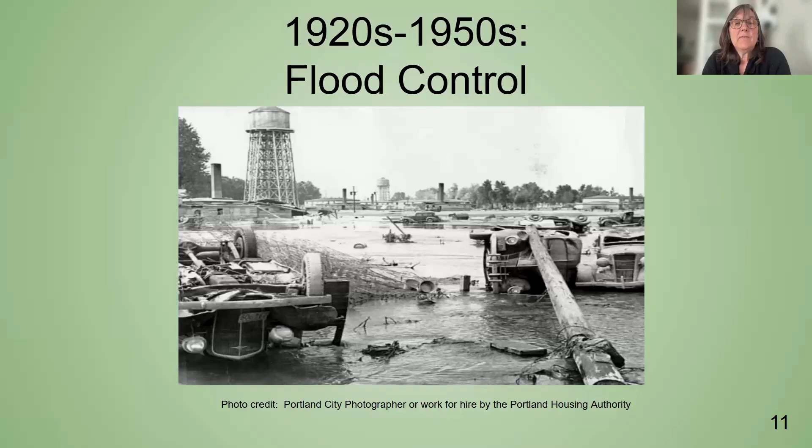Coming out of World War II, an iron triangle had emerged, comprised of elected officials, federal agencies like the Army Corps and the Bureau of Reclamation, and interest groups like local and regional boosters, that virtually ensured dams would continue to be proposed, permitted, and built.

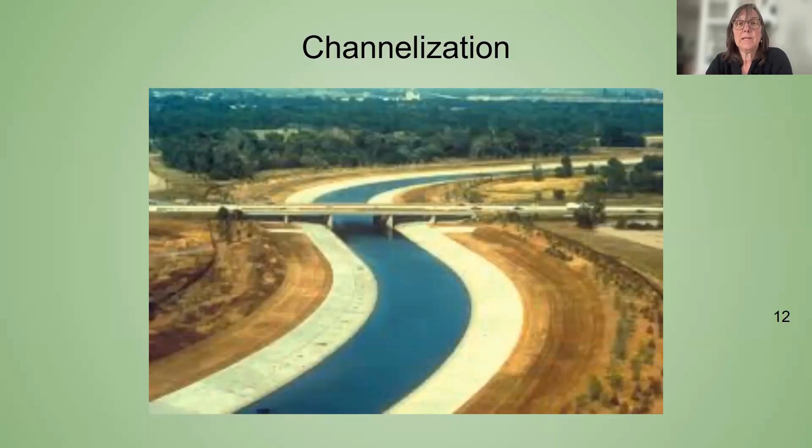These examples have mostly focused on dams, but many other threats to rivers developed, including but not limited to channelization, dredging and filling, shoreline development, upland development that decreases recharge and increases runoff and flooding, and riverine habitat loss.

Water pollution became a top environmental concern for the American public and elected officials. The 1960s and 70s was a time of public outrage over the impacts of industrialization on quality of life, coupled with new environmental consciousness in the U.S. Congress. During this period, a number of new laws geared to protect natural areas and the environment were passed that would have a direct effect on wild and scenic rivers, including but not limited to the Clean Water Act, which first became law in 1972.

This is a photo of the Central Arizona Project, a diversion canal that carries water more than 300 miles from the Colorado River to central and southern Arizona. It supplies water to Phoenix and Tucson, as well as smaller communities and irrigation, and provides flood control, outdoor recreation, and wildlife conservation.

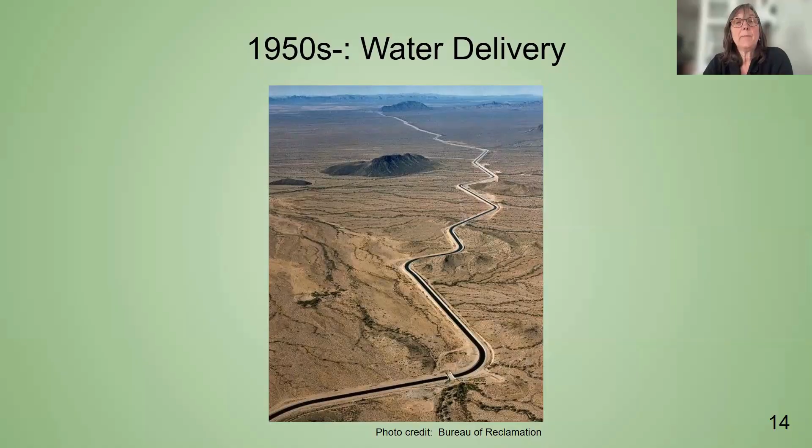It was authorized in the Colorado River Basin Project Act of 1968, and I thought this was interesting to note: it happened to be signed into law 2 days prior to the Wild and Scenic Rivers Act.

By the 1960s, in the U.S., 70,000 large dams greater than 6 feet had been built, and many more were planned and proposed.

There was contentious debate around many of the projects; they were not a foregone conclusion. For example, the Boulder Canyon Hoover Dam project was for many years mired in controversy over the federal role in public versus private power. For many of these projects, there was contention over the federal government investing in a national project that would provide benefits for a particular state or region, and questions of whether the investment was needed and if the promised benefits would actually follow.

Some of these dams are producing power and providing irrigation water for projected future farms and populations that existed only on paper. When a new project was proposed, people could look to dams or diversions elsewhere and see the problems. They could see what had been forever lost, many miles of river and the natural and cultural values associated with it, and they might question if the benefits were worth the costs.

Protection of rivers evolved from fights to save parkland and wilderness, like opposition to the 1923 damming of the Tuolumne River that flooded the Hetch Hetchy Valley in Yosemite. The valley had been important to the Miwok and Paiute native peoples as a seasonal gathering place for thousands of years, its scenic beauty often compared to Yosemite Valley in the south.

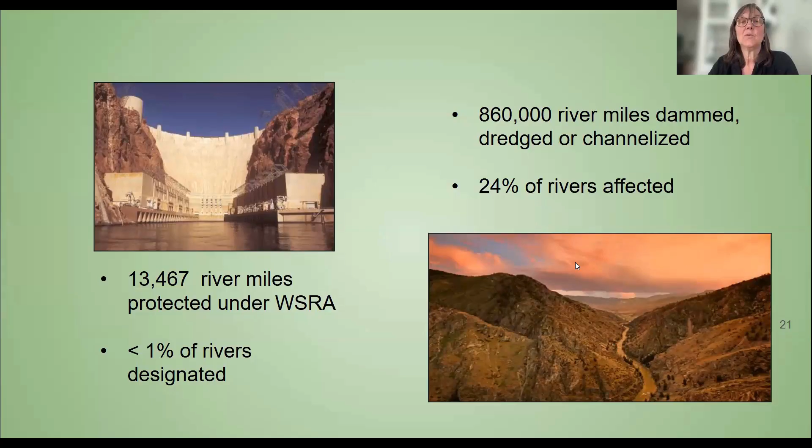As a side note, estimates in 2023 show there are currently 860,000 miles of river dammed, dredged, or channelized. This is about 24% of the nation's 3.5 million miles of rivers, which are not free-flowing. Comparatively, Congress's complement to this policy of development includes designation of 13,467 miles of free-flowing rivers under the Wild and Scenic Rivers Act, which is slightly more than 1/3 of 1% of the total miles of rivers in the United States.

Blackwater rivers in the southeast, like the Black Creek and Saline Bayou, to desert rivers in the southwest, like the Rio Grande and Verde, and more developed rivers like the Lower American in California. One of the newest additions, the River Styx in Oregon, is an underground segment of Cave Creek as it flows through Oregon Caves National Monument. This designation is unique, the first and only underground river in the national system.

There's also a very big diversity in size and configuration, from designated components with only a few miles, like Horsepasture in North Carolina with 4.2 miles, or the Wickahoney Creek in Idaho at 1.5 miles, to designations including the entire river, headwaters to mouth, like the Middle Fork Salmon in Idaho at 103 miles.

Main stem and principal tributaries, such as the Middle Fork Clearwater, where the designated component includes the Middle Fork, Lochsa, and Selway rivers. Also watershed designations such as the Smith in California and White Clay Creek in Pennsylvania.

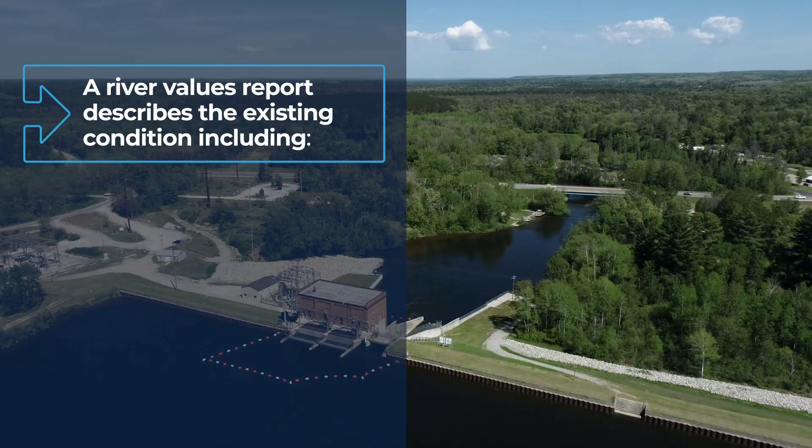These river-related values are the free-flowing condition, water quality, and one or more outstandingly remarkable values, or ORVs. The free-flowing condition is a natural condition without impoundments, diversions, straightening, riprapping, or other modifications. A river values report or assessment describes the existing condition, including baseline flow information, and any up or downstream dams, diversions, or other structures that could negatively affect flow.

Water quality means the condition of the water, including chemical, physical, and biological characteristics. In assessing water quality, specialists define water-based attributes specific to the designated river. The team will document baseline conditions and any specific challenges river managers must address, such as temperature or turbidity, that do not conform to standards.

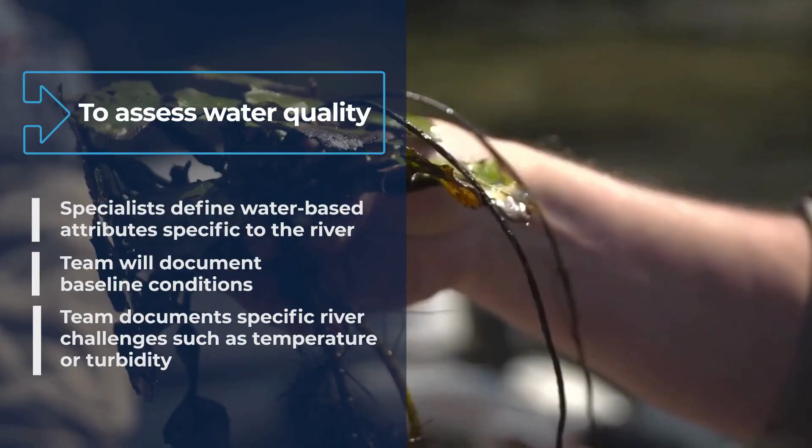In addition to looking at water quality and free flow, you'll also need to identify and confirm or establish, if not previously determined, the justification for the ORVs. Each designated river must have at least one ORV. These could include scenic, recreational, fish and wildlife, historic, or other values. ORVs should be defined for each river segment.

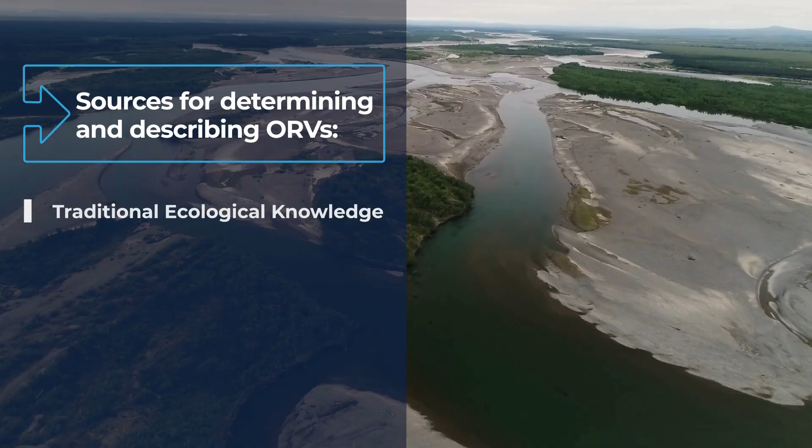Sources for determining and describing ORVs can be traditional ecological knowledge, best available scientific information, historical documents, legislation, previous river studies, and other means of public input. Along the way and before finalizing your ORVs, collaborate with tribes in your region and invite public input. People familiar with the river may have specific stories, data, records, or photos about unique resources in the corridor that support the ORV or region of comparison you seek to establish.

An ORV must be a rare, unique, or exemplary feature at a regional or national scale. The region of comparison provides the basis for meaningful comparative analysis and should be identified by an interdisciplinary team for each ORV category. Regions of comparison may differ between resources and can include geographic areas or ranges of species. The ORV must be river-related, meaning it must be located in the river or on its shorelands within the designated corridor, or owe its existence to the presence of the river.

Finally, keep in mind that ORV descriptions reflect conditions that may change over time. Some river corridors may experience notable changes before ORVs or a CRMP are finalized. For example, wildfire or flood events can alter species habitat or a river's course. In that case, you will need to evaluate changed conditions and determine if that ORV is still present or if it is likely to return.

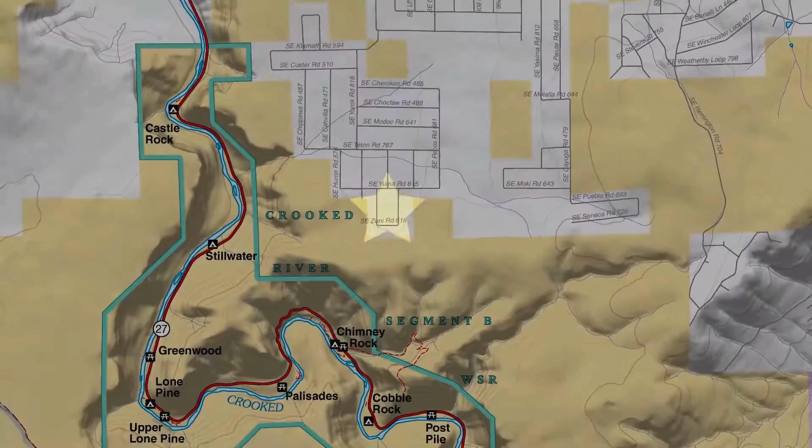A boundary that protects and enhances river values. Until official boundaries are established, an interim boundary will be in effect. You and your team must decide if the Act's general guidance for interim boundaries is sufficient to protect and enhance the river's values, or if a new boundary should be developed.

Consider private or other lands and the location of river-related values. Note that there are limitations to the number of acres per mile that can be included in a wild and scenic river boundary. These limitations in Alaska are different than the other 49 states.

Classifications for each segment of the designated river as wild, recreational, or scenic. Keep in mind that the 3 river classifications are different from the river's ORVs, even though the language is similar. Current land uses, such as grazing, and permitted or general public use, and level of development in the corridor—for example, presence and extent of structures, channel armoring, diversions, and withdrawals.

Management direction to protect and enhance river values, including immediate actions or actions that would be implemented if specific negative conditions are reached. Desired conditions that outline a broad vision of the resource conditions and visitor experience the agency should strive to achieve and maintain within the designated river corridor, and specific relevant goals.

Management and future development of lands and facilities. While a CRMP will not restrict private land use or rights in the corridor, consider including a voluntary framework for development and activities on non-federal lands, and criteria for acquiring private lands from willing sellers.

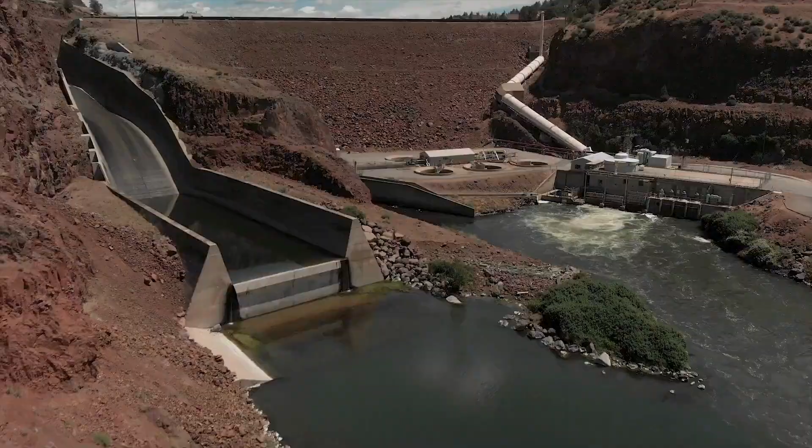The intent of Section 7A is to keep certain rivers free-flowing. While Section 7 applies to both designated and study rivers, this video will focus on designated rivers. Section 7 prohibits new Federal Energy Regulatory Commission, commonly referred to as FERC, hydroelectric projects, while providing protection from the effects of other water resource projects.

Evaluating the effects and whether a project may occur in a designated river is called the Section 7 analysis and subsequent determination. There are two situations that trigger a Section 7 analysis and determination: 1. Projects proposed within a designated wild and scenic river corridor, and 2. Projects proposed upstream, downstream, or on a tributary of a designated wild and scenic river corridor.

A Section 7 analysis and determination also applies if the project involves any type of federal assistance. Federal assistance includes permits, funding, loans, grants, licenses, or technical assistance. When there is federal assistance, Section 7 applies on both public and private land.

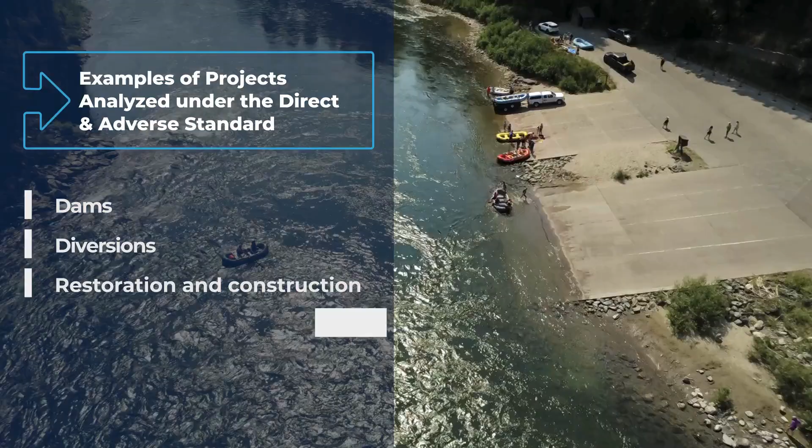For projects within the Wild and Scenic Corridor, the River Administering Agency determines if the project would have a direct and adverse effect on the river values, including free-flowing condition, water quality, and each ORV for which a river was designated. Examples of projects in this category are dams, diversions, restoration and construction projects, boat ramps, and stabilization and channelization projects.

For projects upstream, downstream, or at a tributary of the designated river, the River Administering Agency evaluates project proposals under the Invade the Area or Unreasonably Diminish standard. Invade implies there would be encroachment or intrusion. Unreasonably diminish requires an evaluation of the magnitude of loss to a river value. Projects that meet this definition may include dams and upstream diversion structures.

A Section 7 analysis will be conducted by the responsible person on your unit. They'll seek input from project proponents, landowners, and other stakeholders before issuing a project determination. Additional information related to Section 7 on both designated and study rivers and a helpful flowchart is available at rivers.gov.

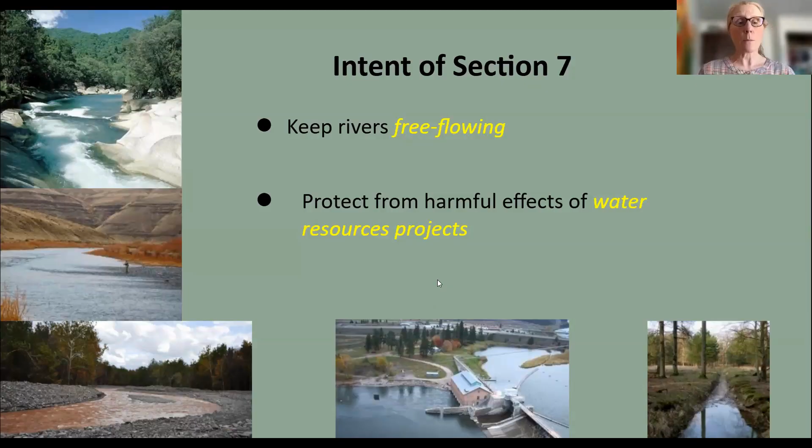So let's talk a little bit more about a water resources project and what that means. The definition includes certain projects under the Federal Power Act, and other water resources projects described in the definition written by the Interagency Wild and Scenic Rivers Coordinating Council. I'll read part of that.

In addition to projects licensed by the FERC, Federal Energy Regulatory Commission, water resources projects could include dams, water diversion projects, fisheries habitat and watershed restoration or enhancement, bridges and other roadway construction or reconstruction projects, bank stabilization, channelization, levee construction, recreation facilities such as boat ramps and fishing piers, and activities that require a 404 permit from the Army Corps of Engineers. There will be more detail on that in the following webinar.

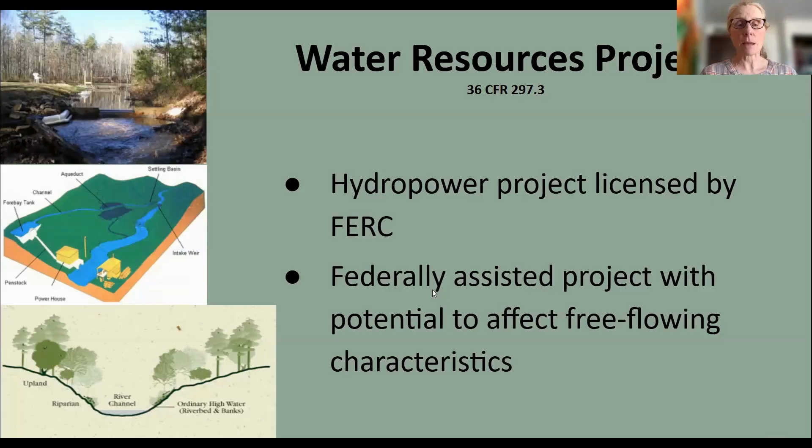So just to talk about where a water resources project has to be to qualify under that definition: within the bed and banks, or below the ordinary high water mark of the river, is essentially one way you can think about it - does any part of the project get wet at any time?

Federal assistance is also defined, and these Code of Federal Regulation definitions are referenced here on the slide. Federal assistance is defined as any assistance by an authorizing agency before, during, or after construction of the project. It could be a license, permit, preliminary permit, or other authorization granted by the FERC. Similarly, a license, permit, or authorization granted by the Army Corps, and can also be technical assistance, such as from the River Administering Agency.

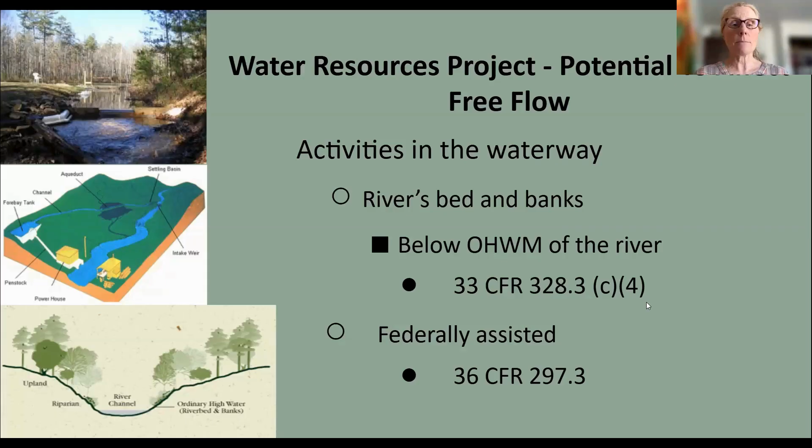There's a connection here to the Protect and Enhance mandate, which we've mentioned, Section 10A of the Act. The main point is that the legal requirement to complete a Section 7 for a water resources project is connected to protecting and enhancing river values.

To summarize what Section 7, the power in this section of the Act provides: a framework for protecting river values - the kind of activity, does it qualify as a water resources project? There will be more discussion about defining and recognizing that in the webinar next week. Specific evaluation standards apply to designated and study rivers, and federal agency roles related to licensing and assisting these water resources projects, including the really important role of river administering agencies.

I'll turn it over to Liz to talk about Section 7 in partnership rivers. Because of the different circumstances on Partnership Wild and Scenic Rivers, conducting a Section 7 review still provides the same level of scrutiny in the final outcomes as any protected wild and scenic river. But it really depends more on working with the local expertise and input of partners that are on the river, given that there's minimal federal agency staff, and there's also a desire to enhance the partnership.

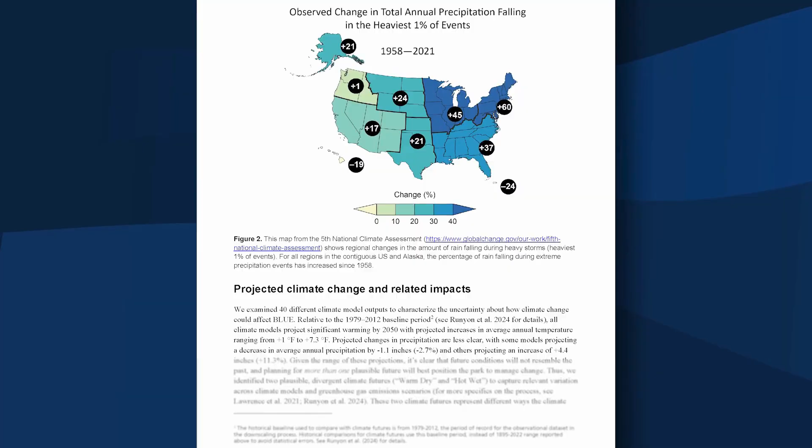First, contact a climate change specialist or coordinator. Your agency should have someone who can offer guidance on how to incorporate the potential effects of climate change into your wild and scenic river planning. They may also know of an existing vulnerability assessment for your area that may depict or address how climate change is affecting or could affect your watershed.

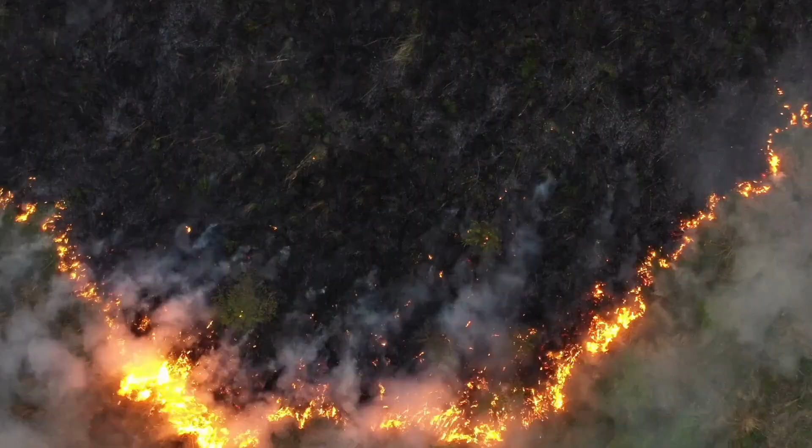Next, understand how your Comprehensive River Management Plan, or CRMP, addresses climate change. The CRMP should consider the potential effects of climate change to river values. For instance, your river could be in a setting predicted to see more frequent and severe rain and flood events. Other potential effects from climate change could include increased wildfire risk, or change in river volume or channel.

Be sure to consider how negative and positive effects relate to each other. For example, groundwater influences may buffer extreme water temperature changes, but a loss of certain species may occur due to warming water. Your CRMP should also include management actions to adapt to these effects.

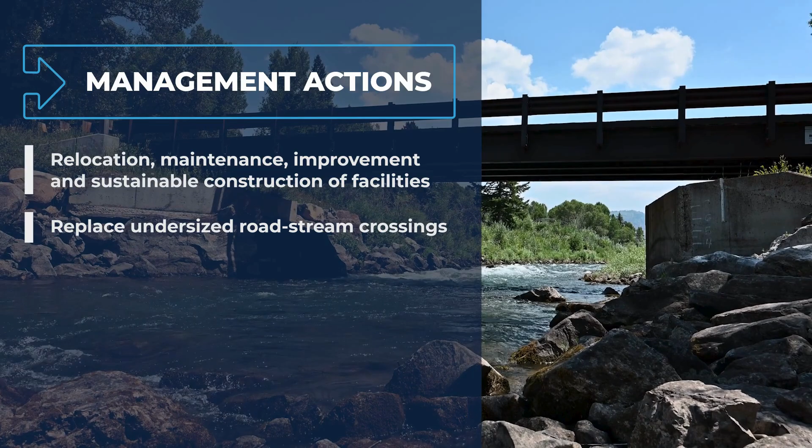These management actions could involve relocation, maintenance, improvement, and construction of facilities using materials that can withstand a range of climate stressors, replacing undersized road stream crossings with structures that can accommodate larger flows and provide improved aquatic organism passage, an increase in the amounts of large in-channel wood to absorb more frequent and severe peak flows, reconnection of stream channels to floodplains, or preservation of the erodible stream corridor.

Finally, public education is an important river management tool. In all steps of river management, it is good practice to find ways to inform visitors about how they can reduce the impacts of climate change, whether at the river or at home.

This video provides a brief overview and only touches on climate change in relation to wild and scenic rivers. Look to your climate change specialist or coordinator, along with a growing body of online resources for more information, or visit rivers.gov for more on wild and scenic rivers.